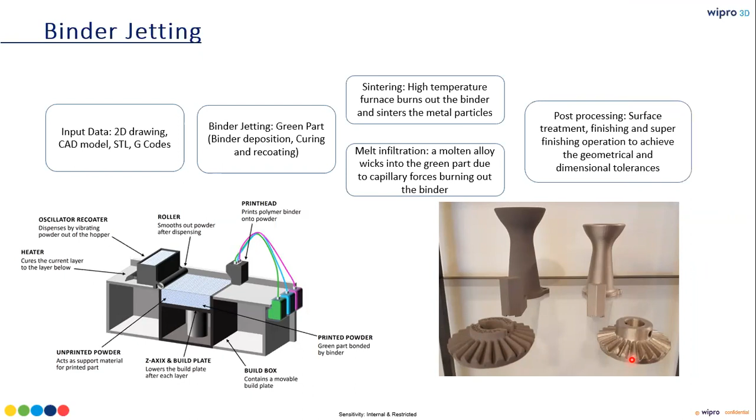You have certain post-processing techniques which will help strengthen these actual parts. So you have to put this part into a chamber, which is like a heated oven, in which you place these parts, and the post processing takes place. This is how the binder jetting technique works.

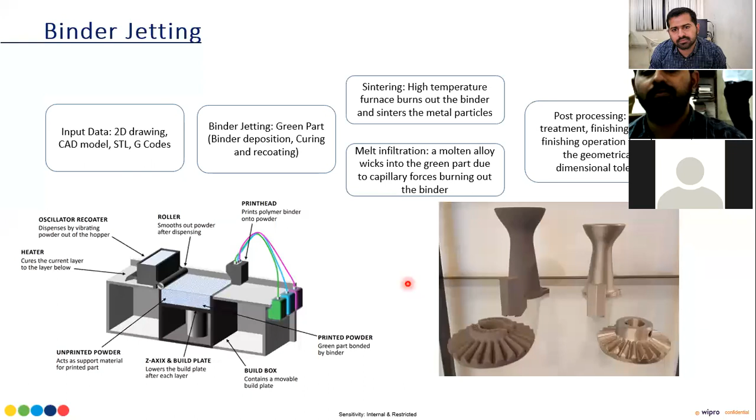So why this variation? Why can't all the material be in the same form? If you go for metal, the metal powder will not bind together when the particle size is larger. It is easier to bind finer and smaller particles compared to thicker, larger particle sizes. Plastics and ceramics, even if a bit larger, or with a larger layer thickness, will still be able to bind.

Whereas if you go for metal, it is a bit difficult. That is why you have to go with finer particles, and you need a very good surface finish. Ultimately, that is what helps you decide which type of technique or methodology you want to use to produce your parts.

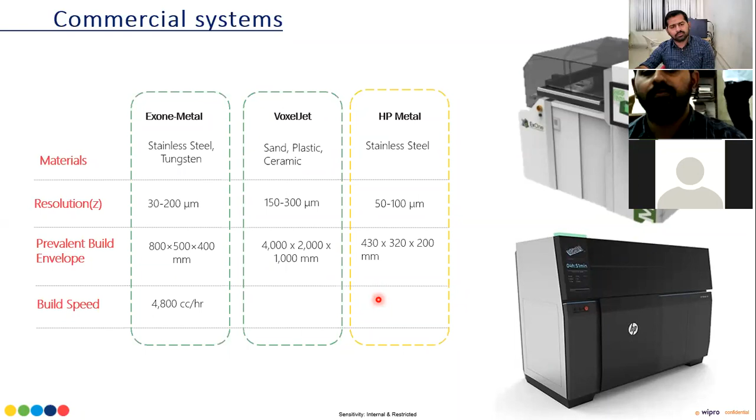The next main advantage and limitation is that, as I mentioned, in this process there is a small heated roller and binder material being dropped, along with the heated roller that binds the particles together. The energy used for that heating process is very low, because most of the energy is consumed only in the post-processing phase. The main purpose of this technique is to bind the particles together to make the basic green part.

It's called a green part, a basic part that you want to further post-process to get the actual part. That is where your binder jetting technique works.

In fact, when you compare to other types of techniques, your cost is quite less compared to other techniques. For example, you have selective laser sintering and direct metal deposition methods available, which are really costly, and they involve a lot of manpower as well as energy in obtaining metal components.

One certain limitation of these parts is you can expect them to be a little porous. Post-processing also is a bit difficult because you have to be very careful that your part doesn't break off when removing the unbinded powder. You have to use a very small, thin mesh kind of brush to remove the binder or other unbinded particles from these intricate designs.

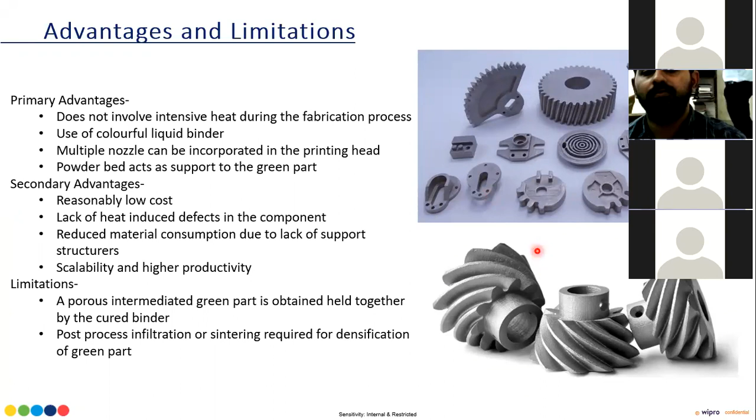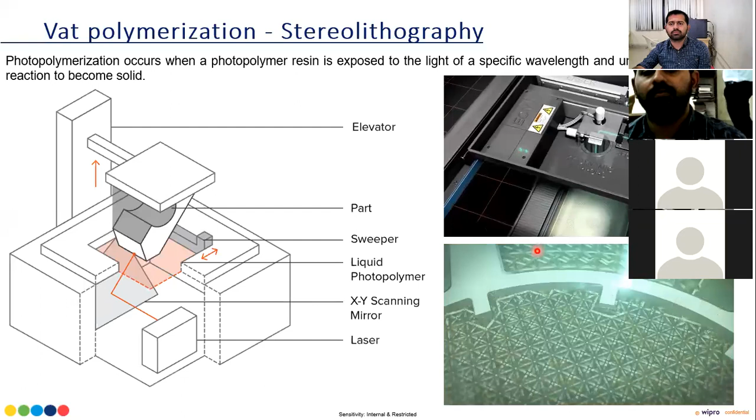And now coming to this VAT polymerization. Since my focus will be more on VAT polymerization and the techniques that have fascinated me in working with this system, I have also developed a VAT polymerization machine at a very low cost in my previous work tenure.

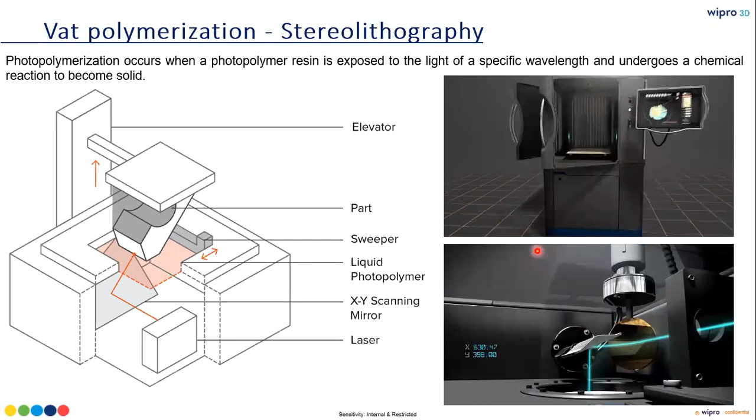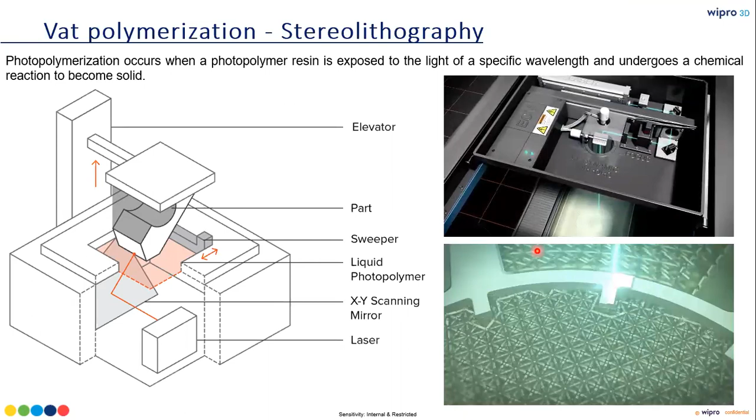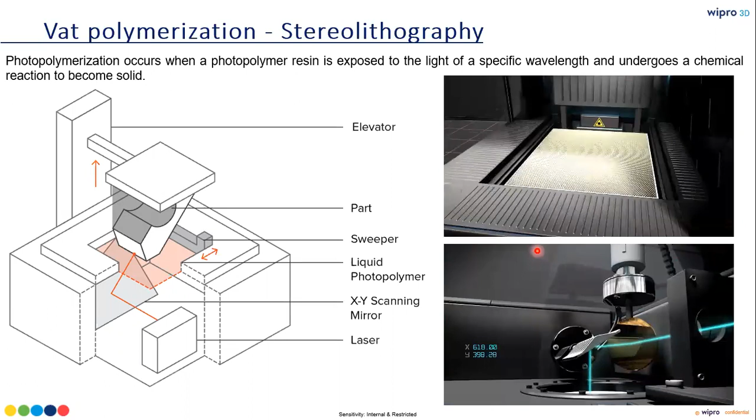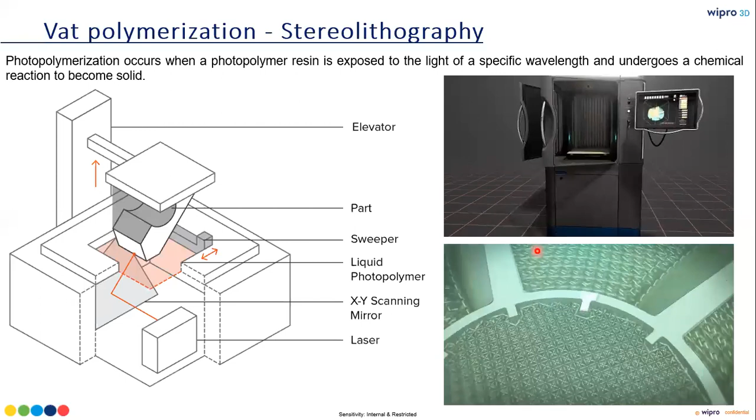So what is the function and how does it work? How does this VAT polymerization work? When you come to VAT polymerization, you have two techniques. One is called stereolithography, another is called digital light processing. So first one is stereolithography. The stereolithographic process is a process where you selectively cure a photopolymer layer by layer.

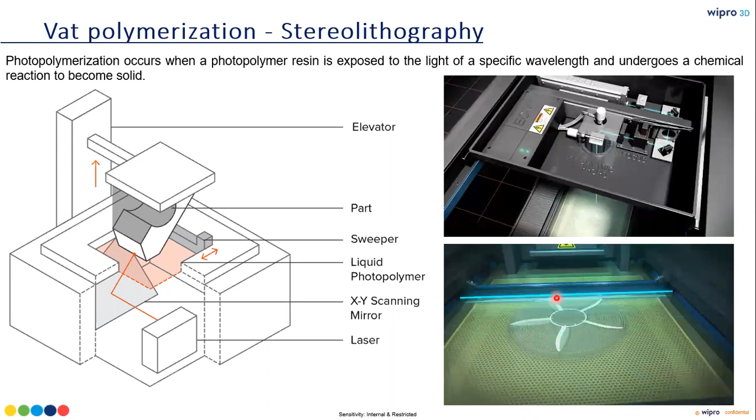So what happens here is, if you see in this video, there is a small tank. In this tank, there will be a certain photopolymer present. And you have a build platform that dips into this tank. It's a perforated build platform that dips into that tank, enough so that a thin layer of photopolymer resin is present on this build platform. Then you have a small blade that spreads and distributes this photopolymer uniformly.

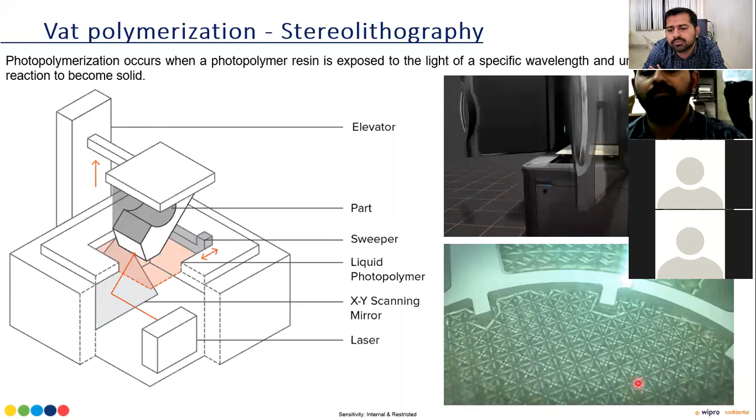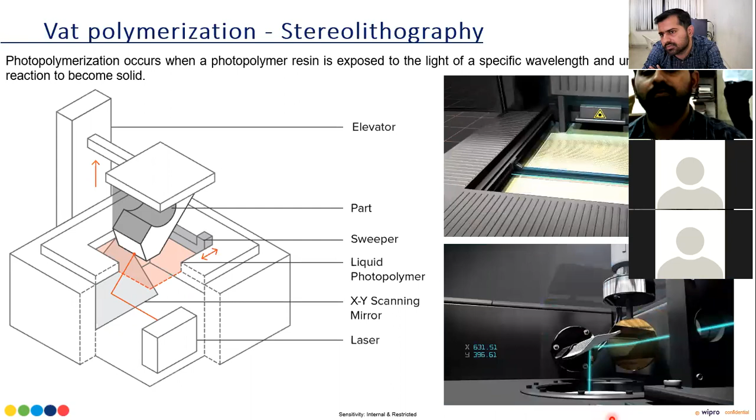And then you have a pointed laser that traces the two-dimensional cross-sectional area of the part that we want to print. This laser will selectively cure on this build platform, layer by layer. Once one layer is finished, the platform moves down one layer, and then a small blade spreads a fresh amount of photopolymer onto this part, and the laser again traces the path layer by layer to obtain this 3D part.

Once this entire part is done, you can remove it and then go for post-processing.

So how does this laser work? What is the process? This laser system will actually be directed onto two different mirrors. One mirror, if you see in this video, helps it trace in the X direction. The other mirror helps it trace in the Y direction.

In the general process of 3D printing, the first thing is to get that CAD model. You have to slice it, and then send that sliced part to the machine, and the machine will print layer by layer. Here, once every cross section is sliced, each cross section is traced by this laser. As the polymer is traced by the laser, it gets cured and solidifies—that is why this is called a photopolymer. This laser will be of a certain wavelength at which this particular photopolymer will solidify.

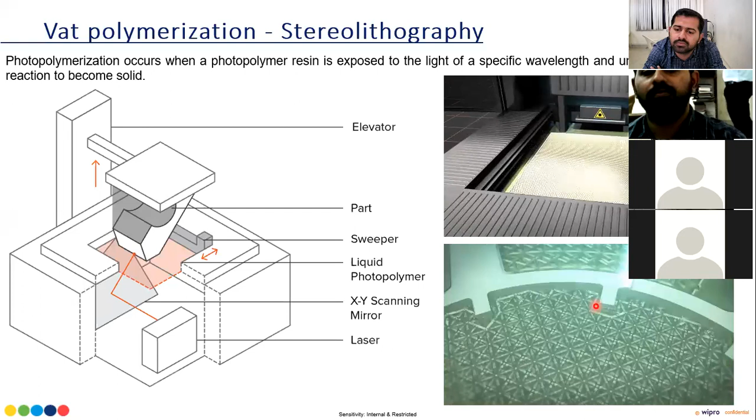Once you expose it to that wavelength, this polymer cures, and it happens in a layer-by-layer fashion, and then you get the final output of the part.

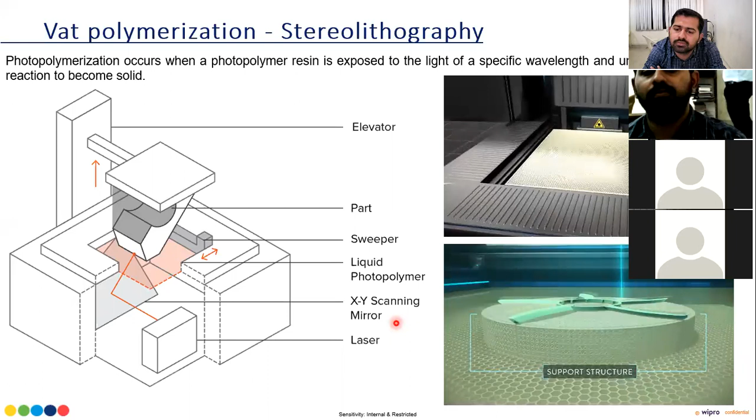Now, in recent trends, we have two types of printing in stereolithography: top-down printing and bottom-up printing. In top-down printing, this is the first traditional method in which the stereolithographic process was developed, like the 3D Systems approach. They developed this top-down approach where you have a build tank and a platform that dips into this tank, and layer by layer, this laser will scan the cross-sectional area and get the actual part. That's the top-down approach.

Another method is the bottom-up printing approach. Here, you will have a small tank containing the photopolymer liquid, and the catch is that the bottom of this tank is transparent. So a small laser traces not from the top, but from the bottom, scanning the cross-sectional area through the transparent bottom. A platform dips into this tank, leaving just enough gap for one small layer between the transparent bottom and the build platform, such that when the laser traces the part, it gets stuck to the build platform, inverted. So the platform is here and the part is printed on top of it.

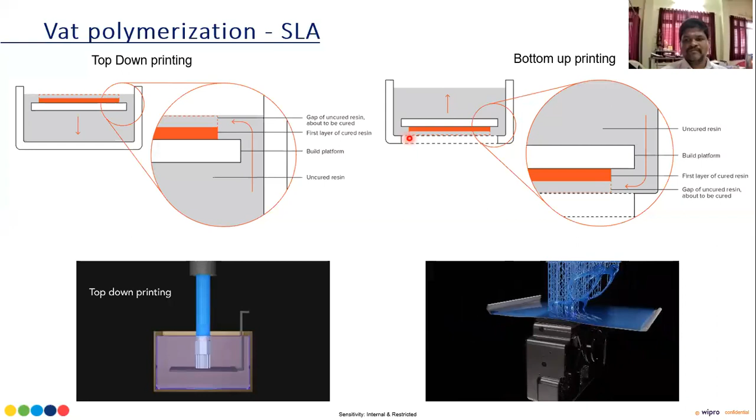Whereas in top-down printing, the platform goes completely to the bottom, and the part, the orange portion highlighted here, is where the actual part is printed. In bottom-up, the part gets stuck to the bottom, and that happens in layer-by-layer fashion, with two-dimensional scanning done by this laser, which helps in solidifying the photopolymer.

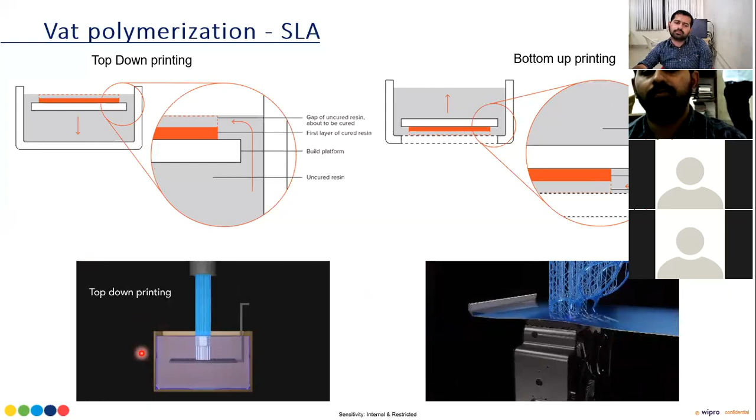Now you might wonder what the difference is, and why you should go with top-down or bottom-up printing. In top-down printing, the tank is completely filled with polymer resin, and the laser only cures the topmost surface—it won't penetrate through the resin and cure the entire build. Only the topmost layer will be cured.

So you have a constraint of keeping this entire tank filled up to the brim. You also have to compensate for the platform being dipped in, because when you dip something into liquid, the liquid rises up—it won't stay as it is. So to compensate for that, you have to maintain the polymer at the brim, and it becomes difficult to always have the polymer present up to the brim. A lot of raw material is constantly needed.

Whereas with the bottom-up approach, you just have to fill enough resin to print one or two objects, or however many you desire. You don't have to keep the tank always full, because the platform goes almost until the bottom, leaving only a gap of one layer, and printing happens only at the bottom of the tank, not at the top. So even as the quantity of polymer reduces after every layer, the bottom layer will always have enough polymer until it empties. You don't have to keep the entire tank full, and you save a lot of raw material with the bottom-up approach.

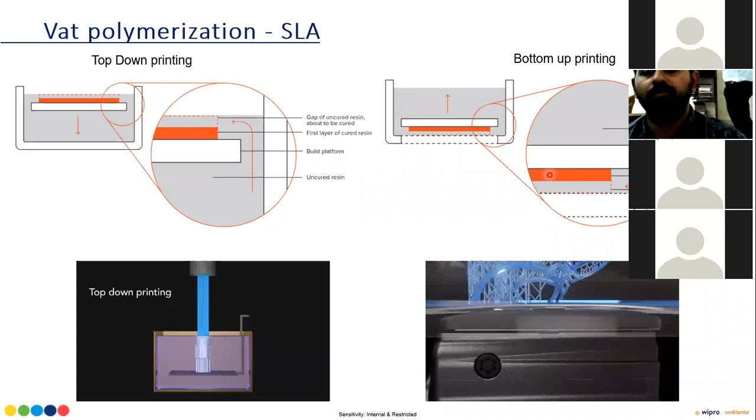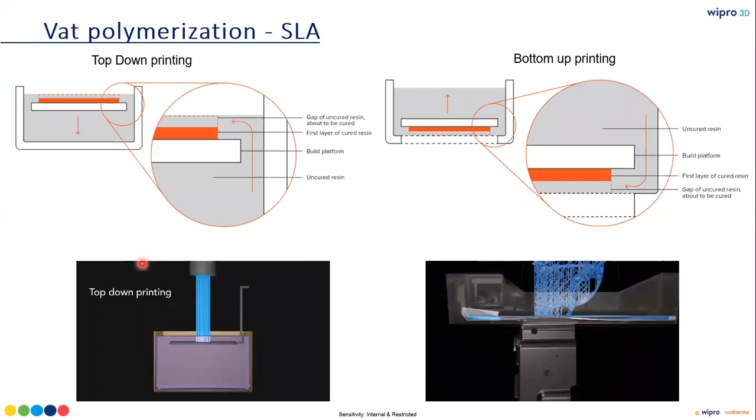In fact, the space required to make such a machine is also much less, because you have desktop versions of SLA available, which are portable and can print fine detail and high-quality prints. Whereas the top-down approach is mostly used in industrial machines—I can show you some of those industrial machines.

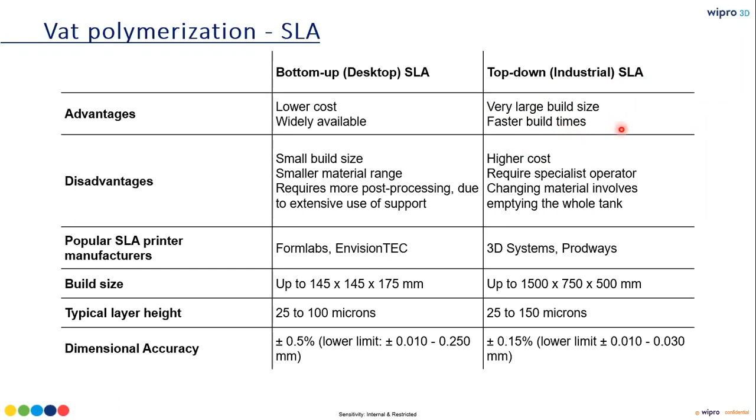So here I've also mentioned the differences, like cost and build size. If you go with top-down, you'll only find it in industrial machines, which are very large, but have much faster build times, because with bottom-up, you have to make sure that every cured layer detaches from the bottom of the tank, since it's going to create some suction.

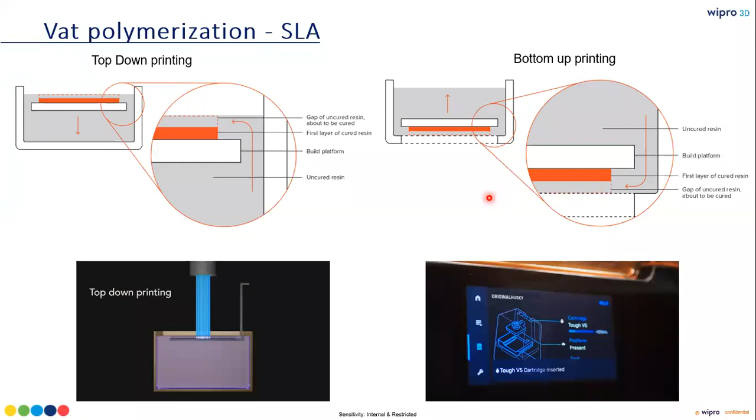It's going to be sticky, either to the build platform or the bottom surface. So you have to make sure it doesn't stick to the bottom surface and sticks to the build platform, because parts tend to stick to the bottom surface. To avoid that, you use a non-sticky transparent layer. There's something called FEP, which is used specifically for this non-sticky transparent layer.

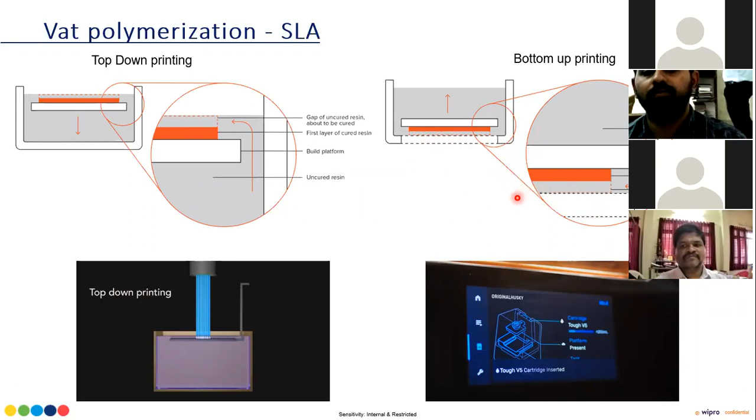Different manufacturers use different techniques. One company, Carbon 3D, uses a patented technology called CLIP - continuous liquid interface photopolymerization. They have their own method for this non-sticky layer, using an oxygen permeable layer which provides oxygen in this region so that the curing process happens really fast. In fact, their system has the highest print speed.

The popular desktop machines using the bottom-up approach are Formlabs and EnvisionTEC. Whereas in top-down, you have 3D Systems, who were not actually the first inventors - rather it was Chuck Hull, who started the company 3D Systems. Chuck Hull holds the patents for the stereolithography process and is the founder of 3D Systems. You also have Prodways, a company that has mastered this top-down approach of SLA. The build volumes of top-down approach are much larger compared to bottom-up SLA.

The layer heights for each of these range between 25 to 100 microns, up to 150 microns - both can range within that. Since it's a liquid polymer, you cannot go beyond 150 microns, because the laser or UV light won't pass through the entire polymer - some polymers are transparent while others are thick and viscous, making it difficult for UV radiation to penetrate. To keep that at a minimum, we try to keep the layer height low. Also, for better print quality, you need much finer and thinner layer heights so you get a smooth surface finish.

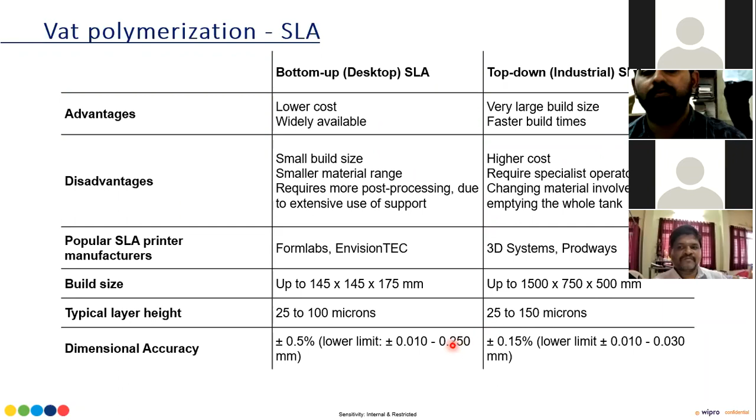The next technique I'd like to discuss is digital light processing - the second type of vat polymerization technique, where you have a resin vat. This also follows the bottom-up approach, where the build platform goes into the tank and lifts up. Here too, the part is printed inverse, stuck to the bottom of the plate - you can see this in the video as well.

You have the resin tank and something below it - a projection system which helps with photopolymerization. I'll explain what this system is. It's called the digital light processing system. There's a company called Texas Instruments, who are the inventors and the only manufacturers of this digital micro mirror device, or DMD. I'll get into the details of how that works.

In SLA, you have a laser tracing every layer line by line. But here, the entire cross-sectional area is photo cured in a single go - an entire layer is projected from below onto the tank, and the entire cross-sectional area cures at once. That's what speeds up the process, and that's how digital light processing differs from conventional stereolithography. You have a UV LED directed onto the DMD chip, which creates the 2D cross-sectional image used for photo curing. The bottom of the tank is illuminated with this cross-sectional image, and then the process repeats.

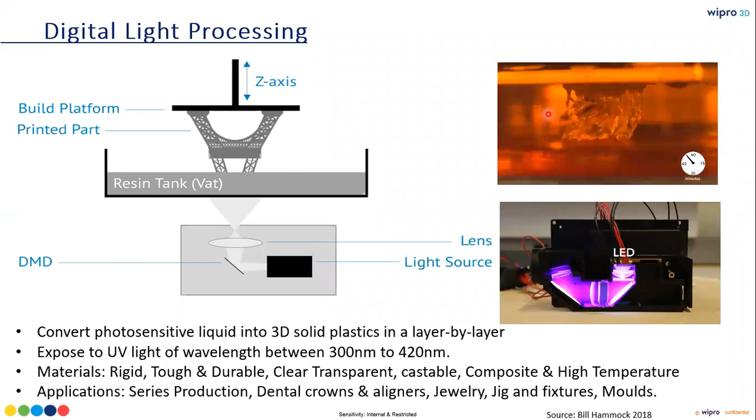Most photopolymers cure in the UV range. When you go with the material, you have various composites available. In fact, whatever is available for the SLA process is also available here in digital light processing as well. The application is very wide and vast, be it series production, and specifically in India I have seen them using it for dental and jewelry applications. Still, the adaptation has been very slow to this new technique, but I feel it has very good research opportunities. There's a lot of research opportunity available in this technique, and people will definitely adopt such technologies—just that you need to give that awareness.

So now let me get into details about what is this DMD chip and how does this work.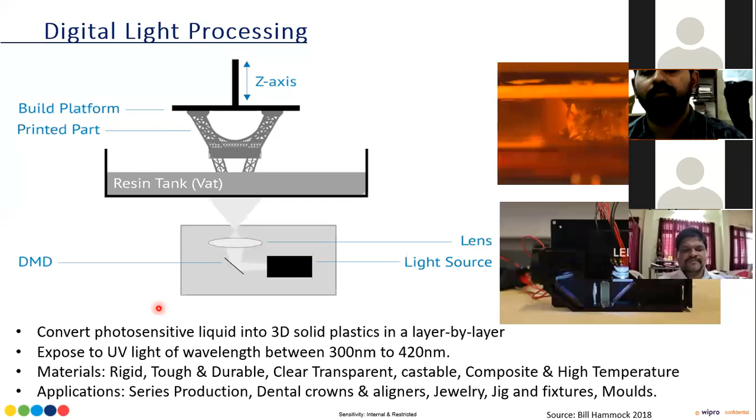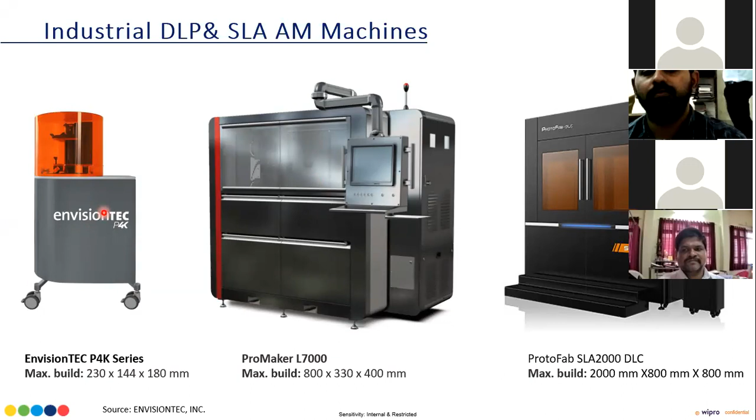So I will show you what exactly this DMD is and how it works. DMD is nothing but digital micro mirror devices. As I said, these are developed by Texas Instruments, and they are the only ones in the entire world who manufacture this DMD chip. In fact, they have grown to this range because of this invention.

So what happens is you have two options. Each mirror is electronically controlled, and it can either rotate by plus 12 degrees or minus 12 degrees. If it rotates to plus 12 degrees, the light which hits onto this mirror gets reflected towards the projection system.

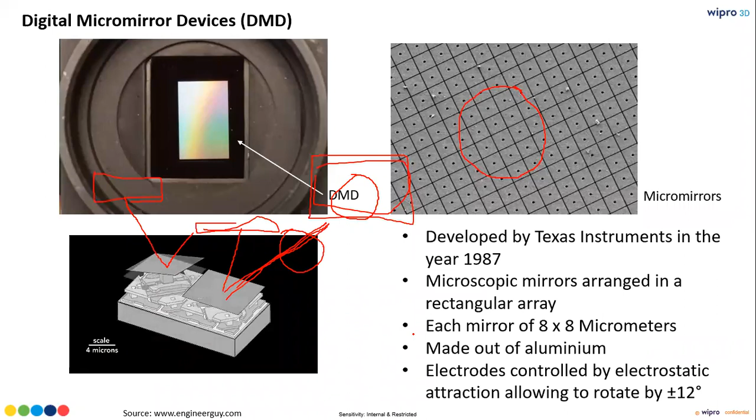Now, when it comes to DMD, you can clearly see that if I am printing one object, or if I am printing 5 objects in parallel, it's going to take the same amount of time. Why? Because every layer is cured in a single stretch.

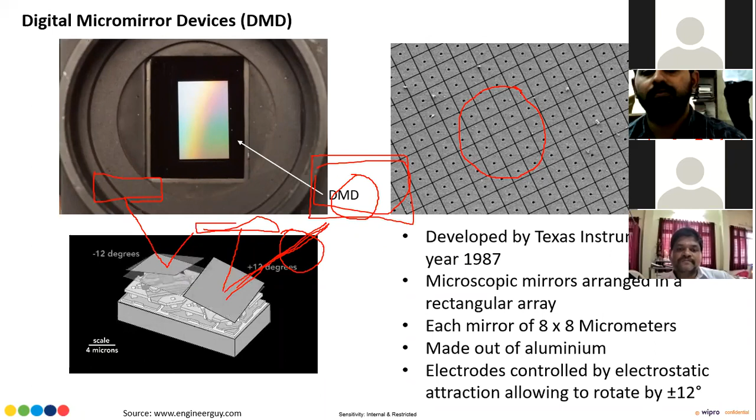So even if I have one part on my build platform, or if I'm having 10 different parts or 5 different parts in the same place, the time taken for all those parts is going to be the same, because the entire cross-sectional area is going to be cured in a single stretch. So if I'm printing a pen, which approximately takes me around 10 hours to print, even if I'm printing one prototype, or even if I'm printing 5 in a series, it's going to take 10 hours, because the entire layer is being projected at a time.

Now, coming to another technique which I have personally worked on is the liquid crystal display technique. If you see in a projector system, only if you place a projector at a certain distance will this projector system work, because you need to keep a certain distance between the projector and the screen you project light onto. Only at a certain distance will you be able to focus that image onto that platform. But this will lead to a larger area and a larger machine size.

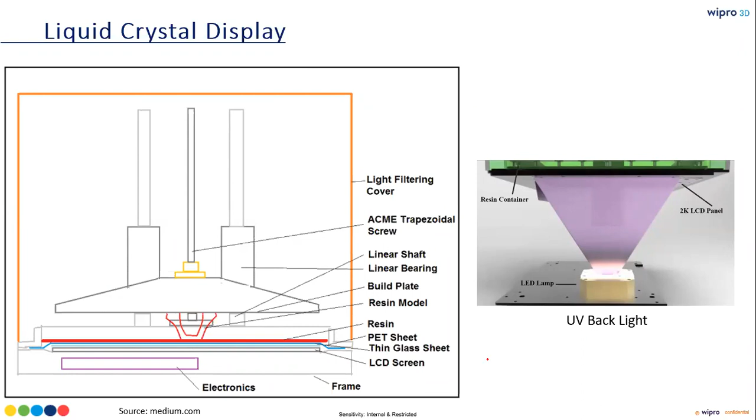So to overcome this challenge, I have worked on one particular technique using liquid crystal display, where your LCD will also display two-dimensional images. Like how a projector displays a two-dimensional image, your LCD also projects a two-dimensional image. So instead of projecting this two-dimensional image onto the bottom of the tank with the help of DLP, I'm going to project that same image using a liquid crystal display.

There are certain specific types of LCDs that are not quite similar to present screens, laptop screens, or mobile screens, which are also made up of LCD. They're very similar, but whereas your current LCD screens or phone screens will not give you UV light - they give only visible light, this particular LCD will specifically give you UV light. Your photopolymer cures only in the UV range. In fact, there are polymers which cure in the visible range, but if you go with UV polymers, you will need UV light.

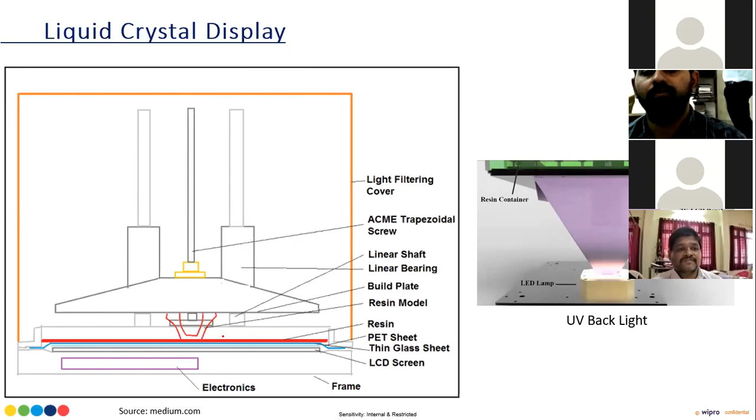So how does this LCD exactly work? Let me show you. Just imagine - most of you would have seen this. It's called a polarizer. You will have a small thin sheet with black and transparent strips of patterns on it, and you will have two of them. In fact, in some of the labs we might have used this. I hope you would know what a polarizer is.

This polarizer works like this: you have general light coming from some source - it can be a bulb, lamp, sunlight, be it anything. You have two types of polarizer, one horizontal polarizer and one vertical polarizer. The horizontal polarizer allows light to pass through it, and you will have light which is polarized as horizontal light.

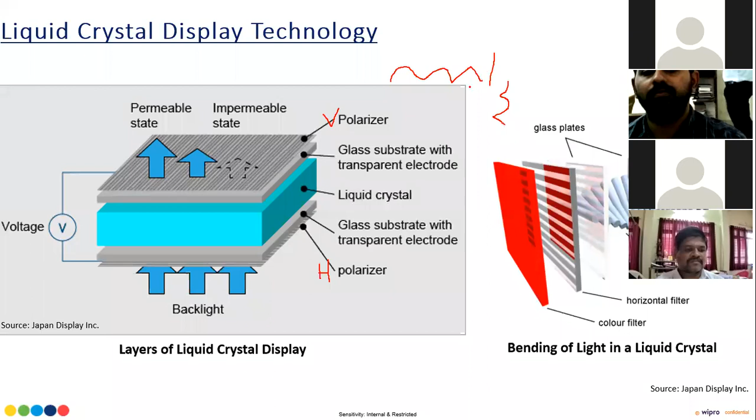So only a certain type of light will pass. Once light passes through a polarizer, it will have a specific waveform, say the horizontal waveform, and only that light should pass through. You also have another polarizer called a vertical polarizer, where only vertical light will pass. So imagine you have light waves, only horizontal and vertical will go through. Only a certain wave angle of light will pass through this horizontal polarizer.

And if you place a vertical polarizer on the other side, the light will not pass. Why? Because once the light passes through the horizontal polarizer, only horizontal waveforms will be present, and that will not pass through the vertical polarizer, since you don't have the vertical form of the wave light present. So what you need to do is bend this light such that it passes through the vertical polarizer. So if you place two polarizers, vertical and horizontal, no light will pass.

But if you place two horizontal polarizers, all the light will pass. So what this liquid crystal does is, the moment you apply a certain voltage across that crystal, it bends the light by 90 degrees. So when I have horizontal polarized light passing through this polarizer and hitting this liquid crystal, it bends the light by 90 degrees. Wherever I bend it, that is called the permeable state, where the light bends and passes through, and I get light coming out. Wherever I have not applied voltage, the light will not pass through because the vertical polarizer blocks it. So that is the impermeable state. This is how you control whether light passes through that pixel or not.

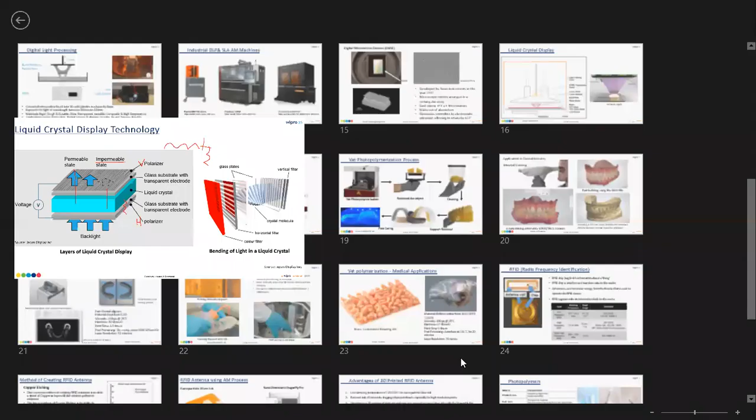So this is how LCD works, and with this technique I'm able to project an entire image. Even in your phone screen or laptop screen, any screen, you will have these pixels present, and each pixel will have this RGB filter, beyond which the light passes through. If you have a black screen, none of the light will pass through. If you have a complete white screen, the light will pass through. So that is how your LCD works.

Next, how the photopolymer works. What are these photopolymers? Photopolymers are liquid materials which contain three major components: one is monomer, one is oligomer, and another is photoinitiator. Monomer is the one which helps us make the actual part that we want. We can combine multiple monomers to vary the property of the material that we want. Then we have oligomers.

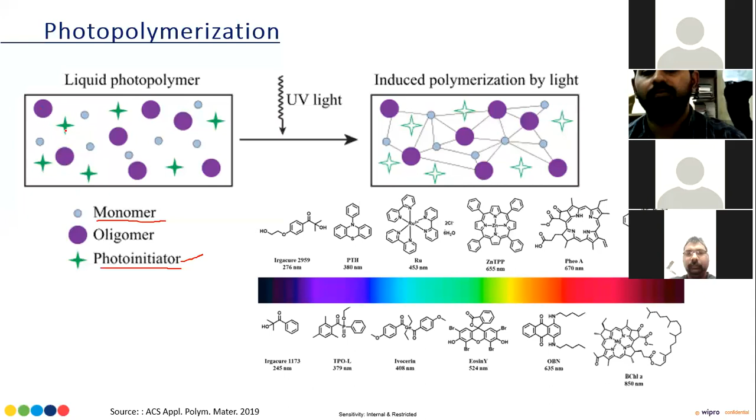Monomers and oligomers are the ones which combine to form a solid part. Then we have photoinitiators, which initiate the process of polymerization. So you have liquid polymers which have monomers, photoinitiators, and oligomers.

To go from liquid state to solid state, I project a certain UV light of a specific wavelength, which initiates the process of solidification. Our UV ranges from a wide wavelength, that is 200 to 276, or beyond that, up until the visible range, that is 850 nanometers, somewhere around red.

I think the visible range is somewhere around 450 and beyond, which is our visible range. This range is where our LCD screen works, and below this is where our UV works. For every wavelength of light, we have different monomers and oligomers, and the corresponding photoinitiators.

Majorly, we work in the 405, or 400 to 405 nanometers range. This is just below the visible range, because we cannot work with the highly UV wavelength range, since we don't have access to such UV lights. Also, it is harmful to us. So in the current trend, we only work close to the visible range wavelength, somewhere around 400 to 405 or 410 nanometers.

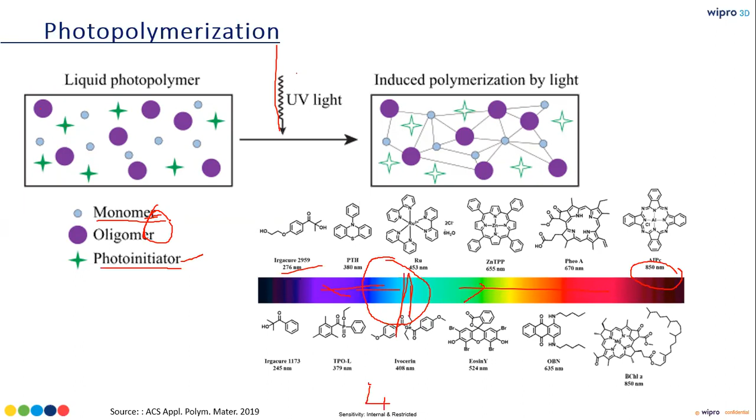Like I said, we can combine different monomers to change the property. Suppose you want flexible material, tough material, or castable material - all that will be a combination of these, and you can combine different monomers to form different polymer chains that you want. This will help us determine the material or the part that we want to print.

What is the typical process, and where is this being used in the current scenario? The first major application I told you is in medical and dental fields. In fact, it is widely used in dental applications to create crowns, bridges, aligners, and surgical guides. Various applications are present, and the process is quite simple.

Be it SLA or DLP, once the photopolymerization or printing happens, you have to remove the object and clean it, because these resins are not skin friendly - they are harmful. Not very highly harmful, since there are certain resins which can also be handled by hand, but most of them are a bit harmful.

So the first thing for you to do is clean it, with isopropyl alcohol, which is fine. Then you have to remove your supports, because since these parts are printed out of liquid, you also have to generate supports along with your part.

Once the cleaning is done, you can do two things: either post cure it, or remove the support material first. Post curing is where the part completely solidifies and becomes hard and tough, reaching our desired material properties. You can either remove the support material and then do post curing, or do post curing and then remove the support material - this is interchangeable.

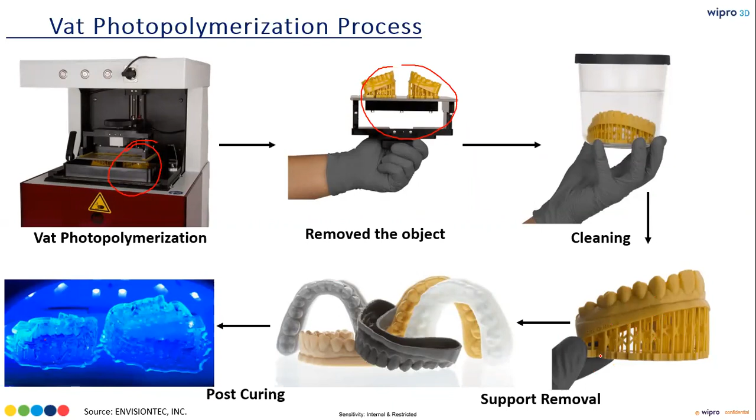Support removal is mostly preferred before post curing, and after that you can do post processing - sanding, painting, priming. All that additional post processing can be done after removing the supports, which is much easier compared to removing the support and doing it later.

This specific application is where scanning also comes into place. In the dental industry, they have intraoral scanners. What happens here is you have a scanning system that helps you scan the entire contours of your internal mouth structure, and you can create an STL file. STL is nothing but a CAD file used specifically for 3D printing. It's called a mesh type of file.

Nowadays you also have something called .amf, the additive manufacturing file, which also stores certain parameters along with STL files. So you scan it and get a DMX file, that's what your scanning system gives. Then you can remove all the extra unwanted portions and keep just what you need. From that file you can generate the STL file and create whatever support or additional features you need to that part, and then go for 3D printing.

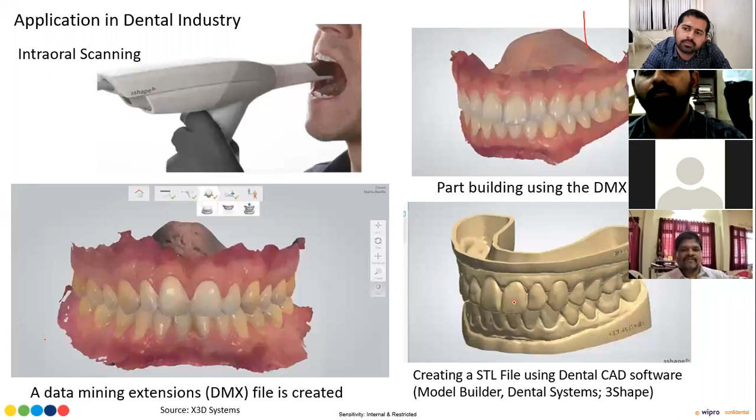Once that process is done, you can go for 3D printing, or use it for whatever application you're trying to do. You can also do batch production. In the conventional process, once you do that STL file generation, you have to do the build preparation, where you put the CAD file into a 3D printing software and help it generate the supports.

You don't have to generate all these supports manually. The software will automatically orient the part, generate the supports, and try to fit it into the build platform. Once this is done, you can check the orientation and go for slicing. If you're okay with the orientation, you can directly go for slicing, which will create a series of two-dimensional images.

You can set various print parameters such as the layer thickness, the layer height, the resolution of the slice, the material, the machine, and the wavelength of light you're using for that particular machine. All these print parameters can be set into the software, and the slicing can be done. This sliced layer is converted into a black and white form.

Wherever you see the white portion, that's where the UV light will pass through the screen and onto the photopolymer. The black portion is where no light passes through, and that resin stays in liquid form. This image of layers, a series of images of layers, is projected layer by layer until the entire part is completed.

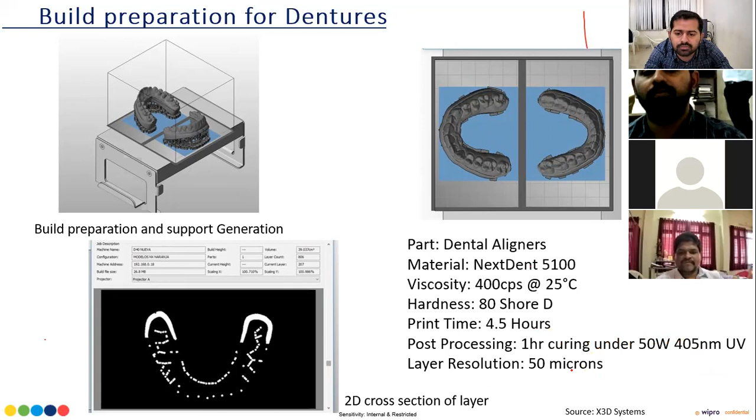You can see they have printed a series of aligners here. There are almost 5 to 6 rows of dental aligners being printed, which can be stacked together by adding relevant support structure. Later you can remove them individually, clean them, and do all your post-processing work, because this helps speed up the process.

You can customize it the way you want, because every patient will not have the same type of aligners—each patient has a different aligner. So you can do a series of batch production for your aligners and get it done very quickly. If you go the conventional way, it's a very long process. This is where 3D printing has advanced the technique of generating dental aligners, and it is widely adopted in this dental application.

This is a UV curing chamber where they place the part into a chamber with UV lights around it to cure it, and the cleaning happens in IPA.

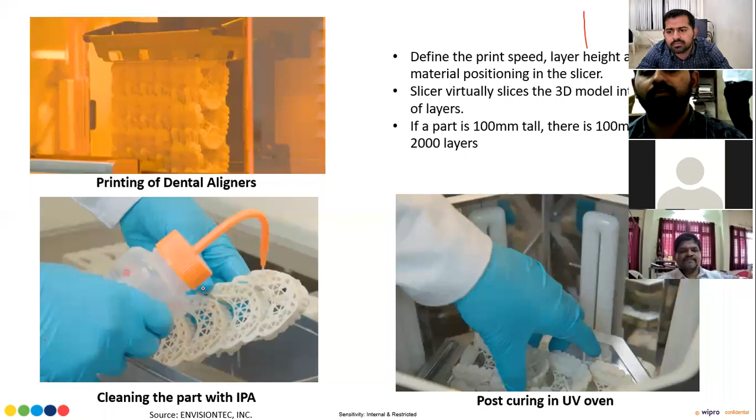Another place where 3D printing is used widely is for medical applications of mass customization of hearing aids. There are two types of hearing aids: one that goes over the ear, where the electronics sit over the ear and the actual device goes into your ear. But nowadays, people have come up with in-ear type hearing aids, which can be mass customized because every patient's ear, be it right or left, will not have the same contours.

So to do that, you can use 3D scanning to obtain the contours, prepare your hearing aid according to individual patient's needs, and print them. You can do mass customization because you're not repeating the same model for everybody. Each patient, you're creating a different one. So you can print the entire batch.

I think around 30 pairs can be printed at a time. Since you're doing batch production, the entire cross-sectional layer cures at the same time. So even if you're printing one set of pairs or 30 pairs, the time taken is going to be the same - it's going to take 6 hours. Even if you're printing one single pair or these many pairs, it's still going to take 6 hours. So you'll be able to obtain more components in the shortest duration of time.

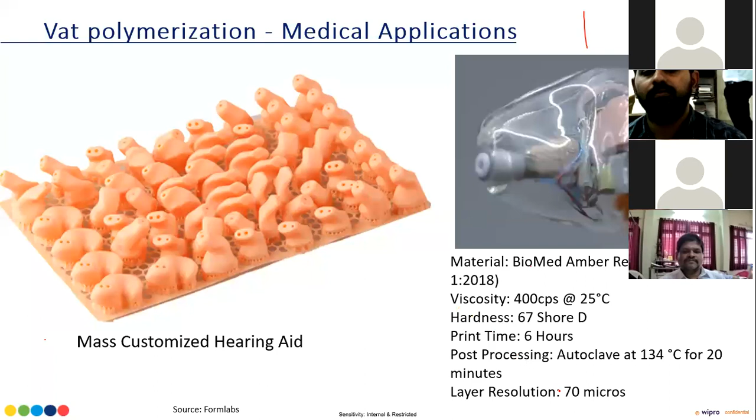Next, coming to RFID - this is one such IoT related industrial application which 3D printing has solved, the creation of RFID antennas. So now you know how traditional RFID antennas work. You have a small coil and a small chip which gets activated when the radiation or pulse comes in contact with these coils.

You have different frequencies of radiation coming in. So there are certain techniques of making these RFID antennas. In the traditional or conventional way, people used to use electroplating technique, or one more technique which I'm trying to recall. Electroplating is one such commonly used technique where you create this RFID antenna.

So you place this small substrate on which the etching process happens - your copper etching or material etching process happens - and post that you obtain that antenna. The other method is called copper etching. So one method is copper etching, the other method is electroplating.

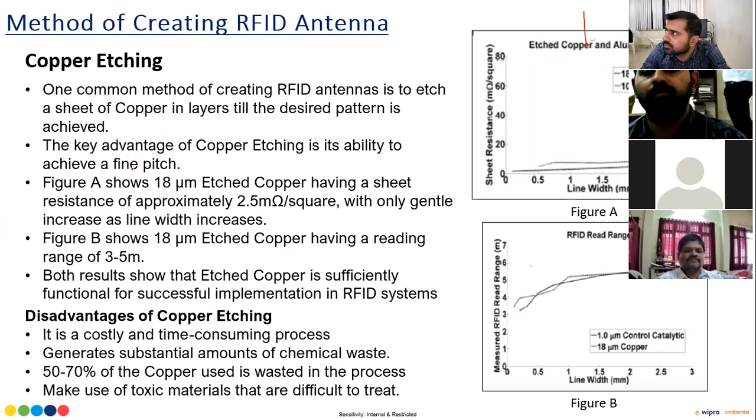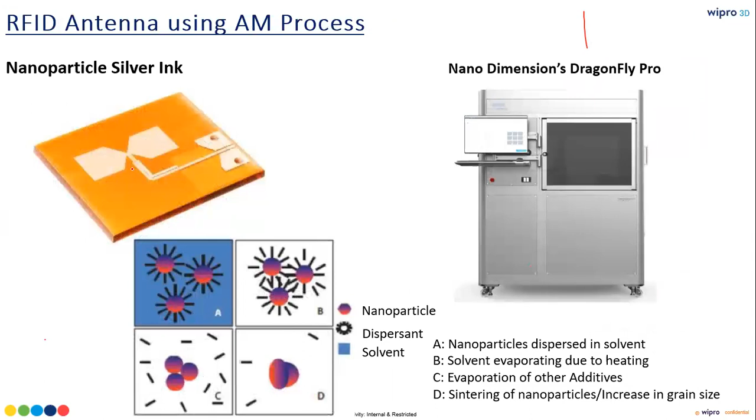So to overcome this challenge, we came up with another method. That copper etching process has a lot of disadvantages, so there's another technique in 3D printing to create RFID antennas. It's called the nanoparticle silver ink technique, where you print these antennas. If you see this antenna, the portion is being printed in a conductive layer.

This is made up of silver, called nanoparticle silver inks. It's similar to the polyjet or multi-jet printing technique, where nozzle heads drop the conductive parts layer by layer in the desired form wherever the conductive part needs to be present. Then curing happens, because it's liquid polymer mixed with nano silver inks, and with that heating, it cures and creates a solid silver component, becoming this conductive component.

You can combine two components: one is the non-conductive base form, and the other is the conductive silver material. Both can be combined together and printed on the same machine, because you have multiple nozzle heads present in multi-jet printing. At different nozzle heads, different material is extruded out. Then you go for post curing and post processing to obtain the actual part you want.

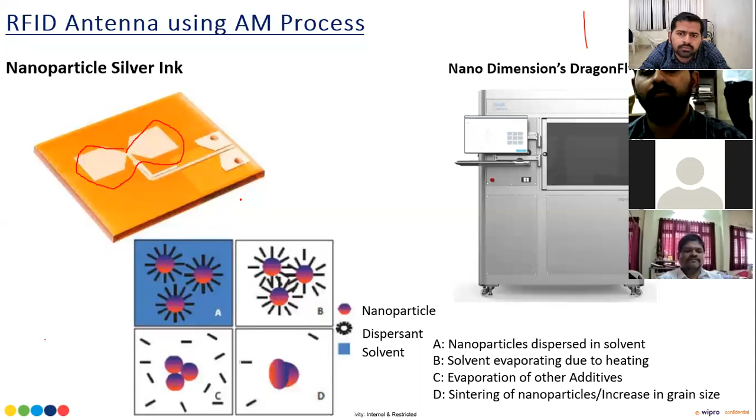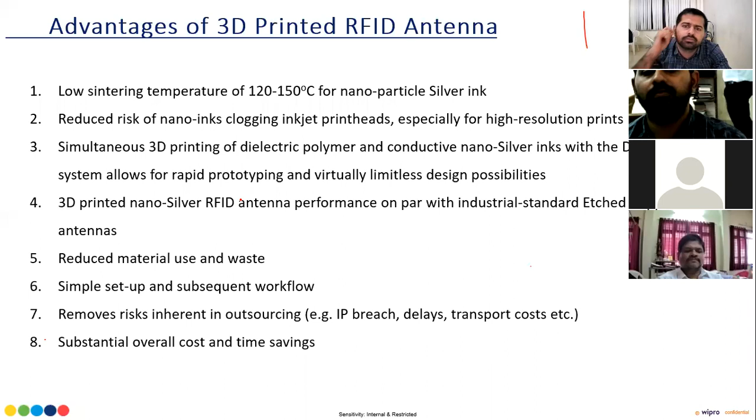That is where the additive manufacturing process has enhanced producing these IoT sensors and devices. There was one more project I worked on, and I think that's included too - I'll show you that as well. The major advantage of these is you can prototype on the fly. You don't have to wait for weeks together to obtain your prototype, and also your wastage is quite less compared to copper etching and electroplating.

The overall cost is very less compared to traditional printing methods. You can go with various material combinations to get the entire part done in a single go. Multi-jet printing gives you very high resolution parts, so there is very little post processing involved, because the surface finish is so excellent. You don't even need to do post processing, and it's easy to directly use it in your end application. That's where the major advantage comes.

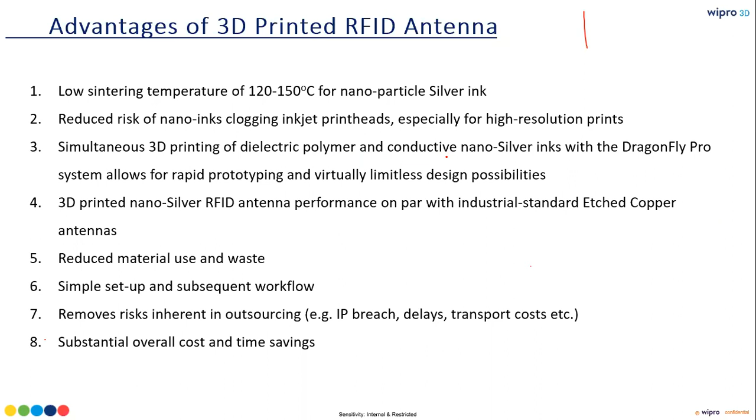Another place I want to show you is here. There's one such project I worked on, called Multiscope. A doctor from a university in Texas, who was our customer, requested a device that would be easy to hold by left-handed as well as right-handed people. When we did the research, most otoscopes and endoscopes in the market were available only for right-handed people, and this was a major challenge.

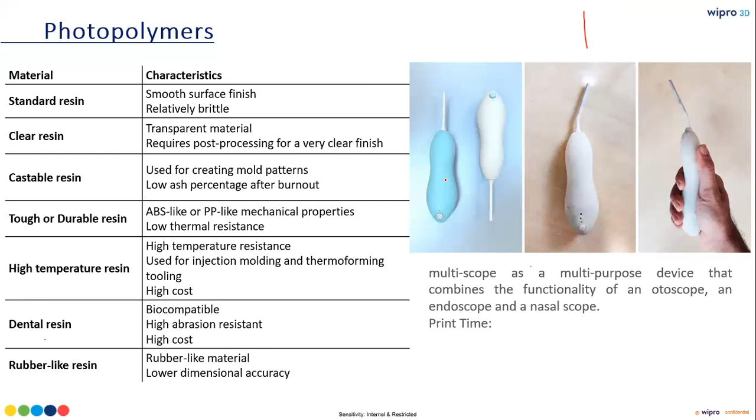So we had to create a scope that suits both left-handed and right-handed people. We went to the drawing room and came up with multiple iterations of design. Once we go with iterations, we have to test them, because just with sketches and 2D or 3D models and simulations, we cannot feel or see how the part works or if it feels comfortable. We'll not know it, right? So to understand that, we definitely have to go for prototyping. The first thing we opted for was going with...

Stereolithographic prototyping. Here, we used SLA technique to get this part printed. This thing is made up of two types of material: one is a tough, industry-grade material, because this portion is going to be held in your hand, so we made this portion in tough material, and the other portion is where it's going to go into your nasal canal or ear canal.

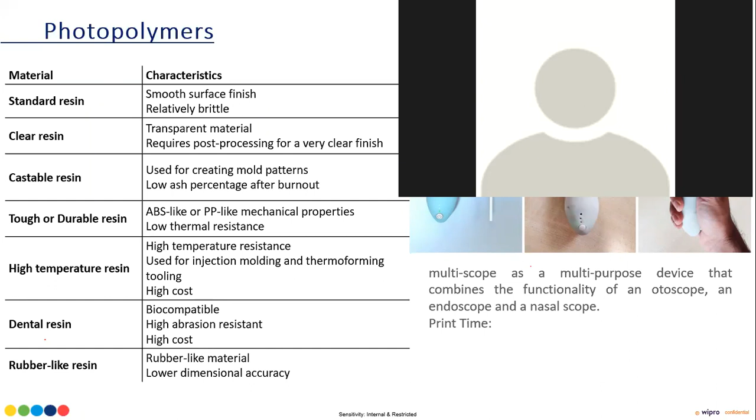So this portion needs to be biocompatible as well as flexible, because it has to pass through that passage. The main functionality of this multiscope is it will have a small camera and a small light at the tip, which helps us see the internals of our canals, be it nostrils or ear canals. So this portion goes into our body, and this particular part needs to be skin friendly, so we have to use only medical grade material here.

So we printed this in two different materials. One is biocompatible material, and the other we printed in tough resin, suitable for holding and withstanding certain strength, because we had to hold it carefully, and it should be comfortable too, since you're using it in a patient's body. We came up with such a device and iterated almost 7 to 8 designs before settling on one design which helped us create this specific part.

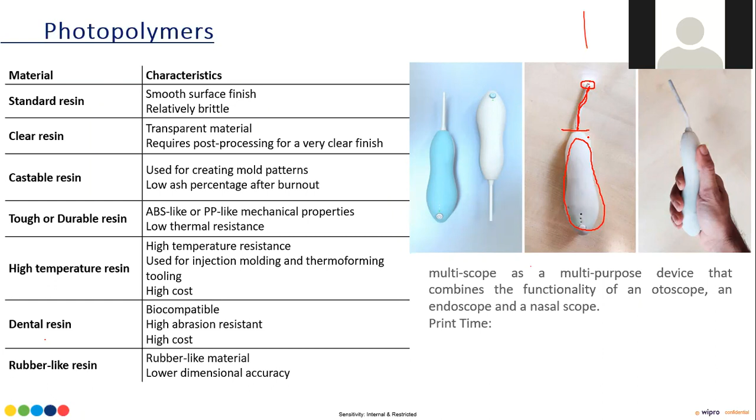We also made this IoT enabled, because the doctor used to stay in the US, and we had to test it and know the parameters or if there were any issues popping up. Also, this camera was used to live stream the entire image or video onto a phone. So all of our electronic devices had to fit within this portion, and the casings and passages for the electronic components were also considered while printing, making it easy for us to iterate using additive manufacturing technique.

Because if you go with injection molding or any traditional method, it would be very difficult to prototype, due to the cost factor. With injection molding you have to make the initial die, and the die machining is also charged separately, so there's a lot of cost involved with traditional methods. This way we overcame the challenge by using the AM process, and it was very easy for us to obtain the desired shape.

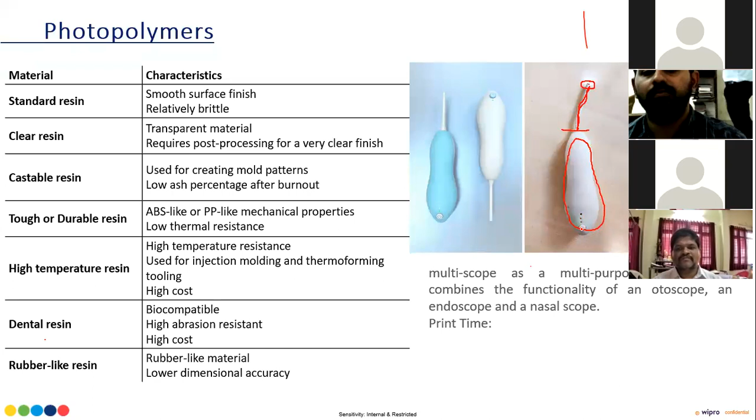There were certain buttons and holes present which allowed connectivity with mobile phones. There was a small antenna present which allowed easy connectivity, and that is what this multiscope helped us achieve. So that is how we overcame this challenge.

We mass produced this only after we were sure the device worked without any issues, because it has to be approved by certain agencies before it can be used by doctors. So that is one thing we had to be very careful about.

So this is one such application where we physically developed an IoT based multiscope, which also logged all the data to a cloud server. From that server we were able to access all the diagnostic related parameters and check if our scope was working right, and we knew how to iterate the next versions of these devices, making it very easy for us to go ahead with production. As I said, there are different polymers available with various characteristics which can be used for various applications as well.